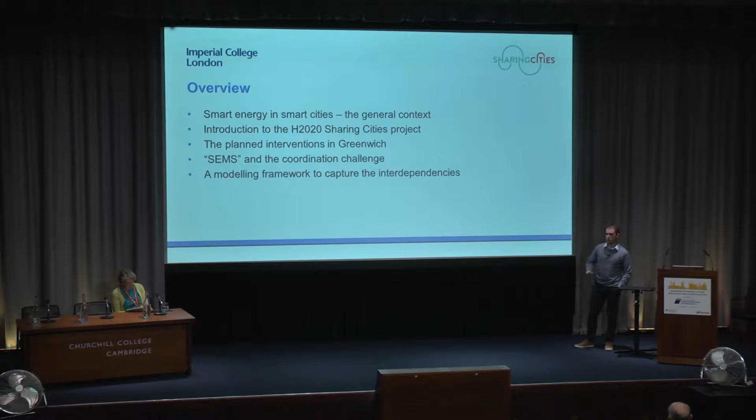Following that, I'll briefly talk about SEMS. That's the energy management system that we're developing as part of this project. The point of the system is to coordinate the different energy assets, and I'll talk about some of the challenges with that. And following that, I'll talk about the real meat of the paper I'm presenting on, which is the modeling framework that you can use to design these urban energy systems, given that they're now controlled in more intelligent manners than before. I'll then show very briefly some case studies.

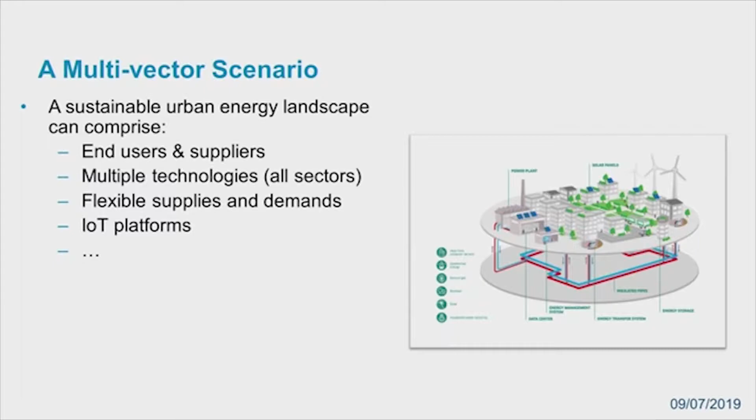So in terms of context, what do we mean when we talk about urban energy and what are the real opportunities here? In an aspirational, idealized case, we can see this as an ecosystem of assets with end users and suppliers all operating in unison to provide globally beneficial system performance. That might mean better in terms of financial performance, better in terms of environmental performance, better for fuel poverty, better for air quality.

There's all these different objectives, but that's a little hypothetical because the problem itself is really complicated. You've got different technologies, you've got different levels of stakeholders between government bodies, the national grid, the energy users themselves, let's say SMEs who own smart sensor companies. So you can really only consider it a smart urban energy system if these assets can collaborate in some way that's actually beneficial for everybody.

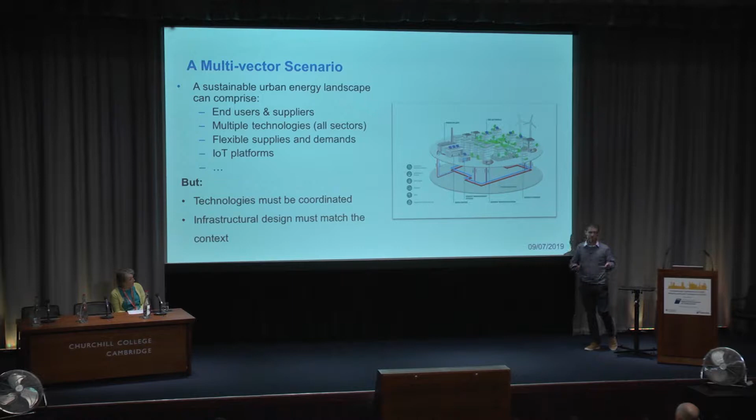And furthermore, because this is more complicated than it would have been before, where all these actors would have been acting in silos, the design of these systems is now a little bit different, and the design is also very contextualized. What I mean by that is that, as with any urban challenge, there isn't any silver bullet. There's no one single solution that will work for every city. Many reasons for that. I've put some of them in boxes here.

You've got different levels of resources available. You've got different policies, different pricing structures for energy types. You've got different mixes of stakeholders, and certain technology preferences. If you're in Scandinavia, for example, you'll have district heating, as that's very common, whereas in many other countries it's not. And following that, there's also cultural impacts.

Again, in Scandinavia, because of these district heating networks, they're quite used to these communal energy systems. So you can talk in terms of system-wide interventions that benefit everybody, whereas that's a lot more difficult to introduce into places that aren't used to that. Then you've got subsidies and taxes as well. It's different everywhere. So you need to think about all these different considerations whenever you're designing these problems.

Which brings me to the Sharing Cities project itself. It's a 25 million project. It's quite large, so I'm not going to give the overview of the whole thing because it's a typical Horizon project where there's many threads. The purpose of it is to set up 3 lead cities as pilot cities where they can act as proving grounds for certain technologies that are becoming new. There are 3 follower cities then which try to take these innovative solutions and apply them to their own contexts.

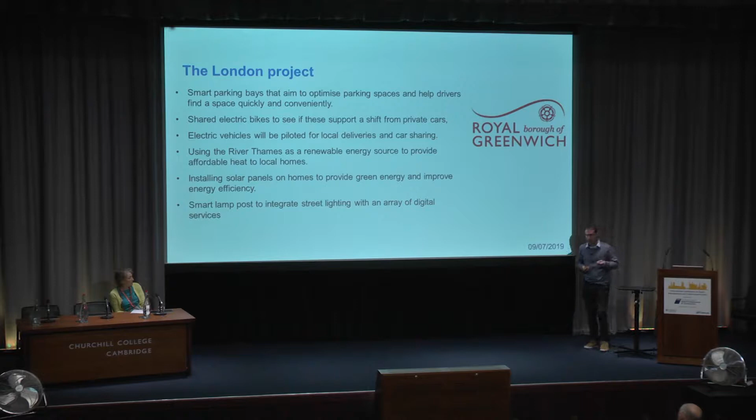And so Greenwich are looking at using the Thames to provide heat for heat pumps to heat the social housing within the district. Further to that, they're also introducing some renewables, that's some PV, and smart lampposts and different things to allow users to interact with these systems.

So drilling down a little bit deeper, just to give you an example of one of these interventions and the kind of stuff that they're doing. This is the Ernest Dence estate. It's a social housing complex with 95 flats. It was built in the 1970s, I think, but they're planning this deep retrofit, and they're planning on putting in proper monitoring systems in the heating systems and putting in demand response and managing this using this energy management system.

So it should act as a useful actor within this energy ecosystem rather than being just a drain on energy, and a poor performing one at that. The existing situation is it's not performing very well as things stand, which means that there's a bad baseline, which is kind of good for research. Anything we do will be great.

But there's 3 gas boilers which are operated continuously, and there's pretty much no monitoring. There's no control that the users have of these radiators, so if the system is on, it's on. The control that they use, you can see if you walk past the apartment complex, is that the windows are always open. So if you want to cool down your flat, you just open the window.

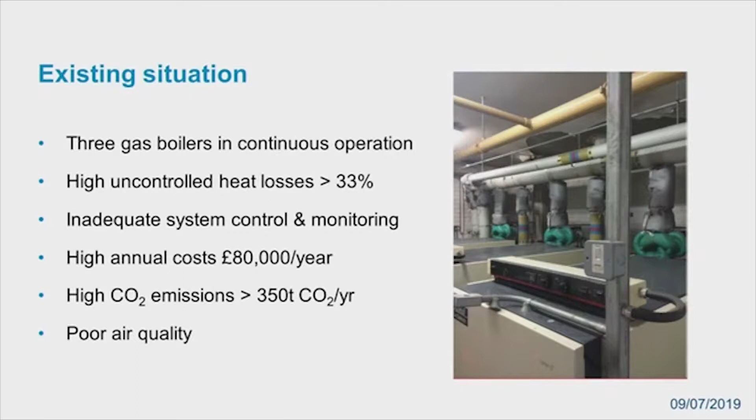The radiator still runs. So it's quite poor, and as a result, you end up with a really high annual energy cost, and you end up with a really high emission rate associated with that. There's also air quality issues if you've got these old boilers running in this kind of urban setting.

So they've got some different interventions that they're planning to put in place. They're doing the typical things such as roof insulation and wall insulation, replacing windows and lighting. They're also replacing the heat network, which is what we're a little bit more interested in, with a low temperature heat network with heat interface units that allow the heat pump taking heat from the Thames to deliver heat to the apartments at a great reduction of carbon.

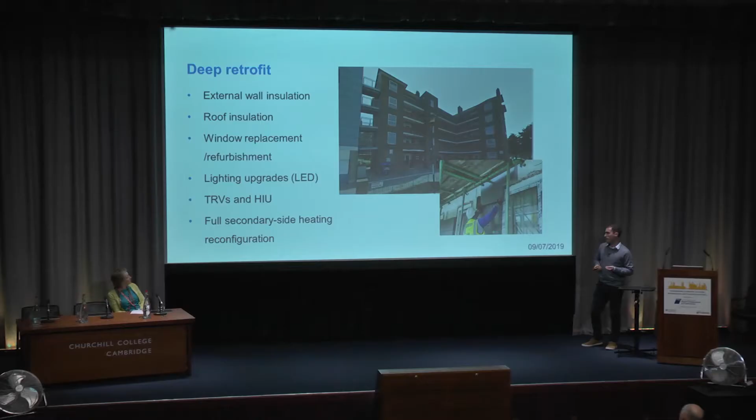And they're reconfiguring the full secondary side of the heating circuit, so you're getting a lot of savings there. So that's one of the main focuses of their work. But in the wider Greenwich system that we're looking at, as well as that Ernest Dence estate, which is in the middle, you've also got PV generation. You've got the heating network, where instead of these old boilers, they're now going to have heat pumps, as I say, as well as some thermal storage.

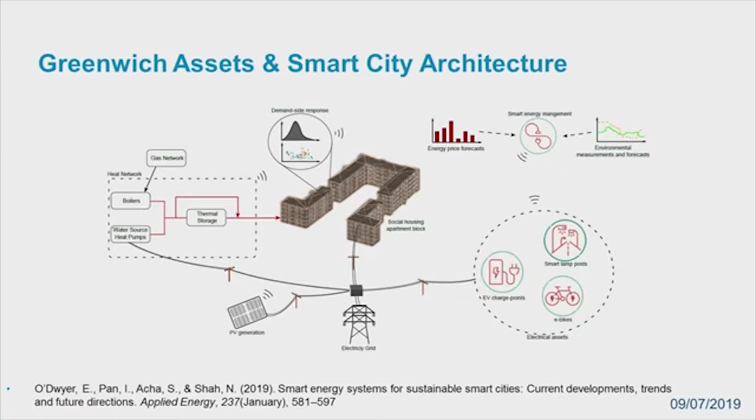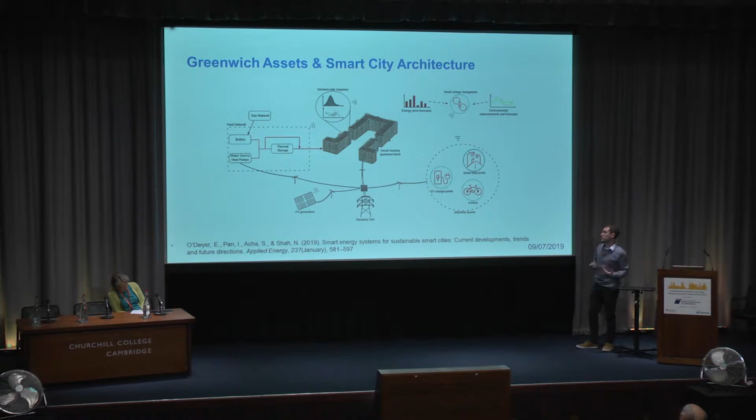So thermal storage is great. You get flexibility that allows you to coordinate things, so you can use the store as a form of flexibility. As well as that, they've got new EV charge points. They've got some e-bikes, some smart lampposts, and the entire thing should be managed by this smart energy management system, which takes forecasts and pricing information and uses various types of intelligence, some machine learning and model predictive control, and new intelligence techniques to provide the solution that works best for everybody.

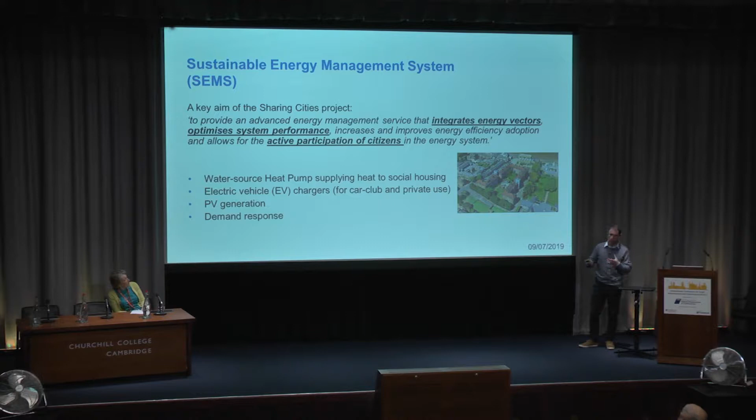So yeah, this is what this energy management system is. One of the main remits of the project is to develop this. So if you've got heat networks and you've got EVs, you can manage the whole thing in a way that if you've got a spike predicted for your EV usage, you can offset that by using the flexibility in your thermal network. So in theory, this is all pretty good. That should work quite well.

So that's one side of it, but also as well as that, with this energy management system, you want to be able to exploit different changes in pricing to allow you to get cheaper energy. You want to be able to exploit changes in the grid emissions, so you can get reduced CO2. And you want to be able to do it in a way that, and this is one of the most important bits, peaks don't completely screw your electricity network.

It's a big thing if you're electrifying everything. That's a massive strain on the current power network, and retrofitting all this infrastructure costs an absolute fortune. So if you can find ways to reduce the need to increase the capacity of these power networks, then it's really worthwhile. So in theory, that all makes sense. In theory, that's fine. But it's a really complex system, so there's a lot of decision variables here, and it's a difficult optimization problem where you need to think about actors at different levels.

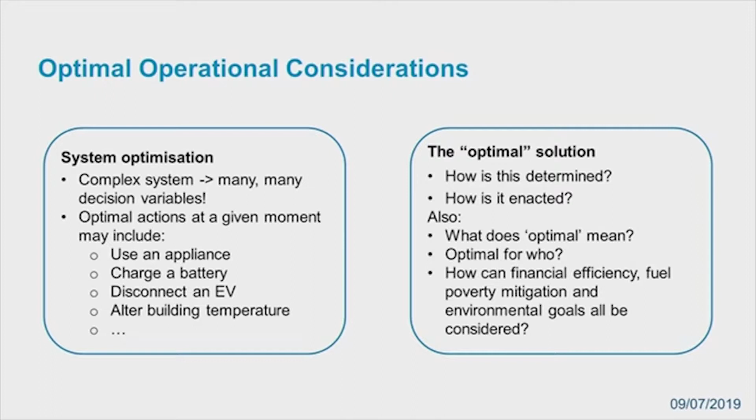As I said before, you've got financial efficiency, fuel poverty, and environmental goals. Fuel poverty can be quite an important one, particularly for councils. One of their main objectives is that you're not managing these systems in a way that somebody could buy a battery because they've got the money to buy a battery and exploit this more, whereas someone who can't afford a battery can't exploit this, so doesn't get the benefit. So how do you do it all fairly?

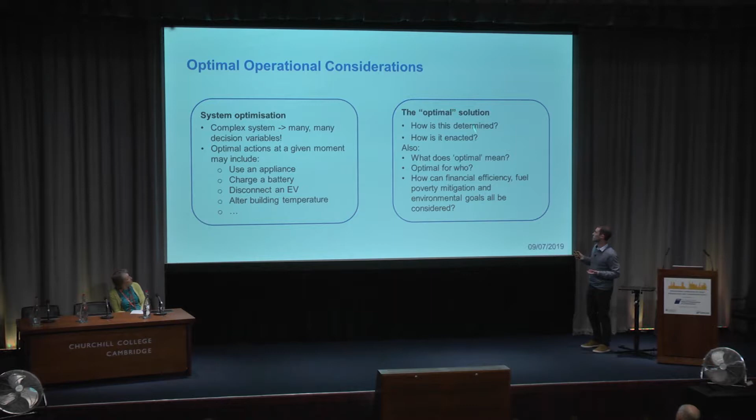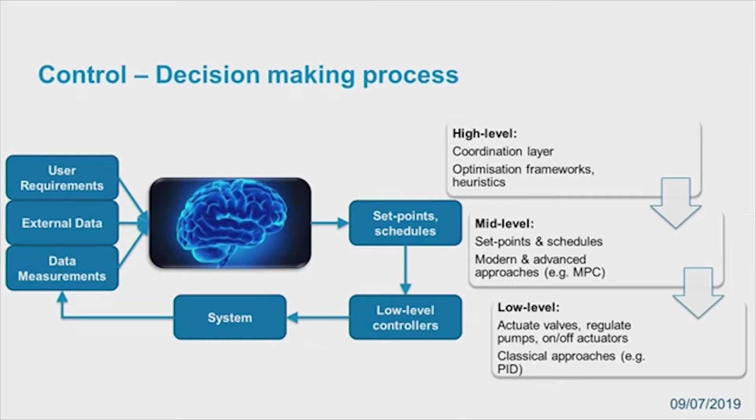It's quite difficult. So the first two points were kind of more technical, and this is sort of how the technical side of it looks. It's kind of a classic diagram that I'd show when I'm giving more presentations about what's actually under the hood of the SEMS algorithm, but it's basically you're taking measurements from the system. You've got wireless sensor networks everywhere.

You're gathering all this data, you're putting it into this brain, which is this mix of machine learning algorithms, optimization algorithms, some model predictive control, and you're spitting out some set points that you send back to the controllers. The point is that you're not actuating at the low level. That's kept separate for the sake of robustness. If something happens here, you don't want the whole system to break.

So you're kind of operating on the mid-level and at the high level. At maybe 10 or 15 minute intervals, you're sending new set points. Maybe predicting operation for a day ahead, that kind of time scale.

But the reason I don't want to go too much into that is because essentially all of this is part of this brain, right? And what is important to consider here is that as much as I might use a slide like this where it's just this mystical brain, that's not actually that useful. If we're dealing with councils and residents and people who actually want to get benefit out of this, cloaking all of this in this mysterious intelligence layer, which is like this magical box that gives you the best answer to every problem you've got, that's not really very useful.

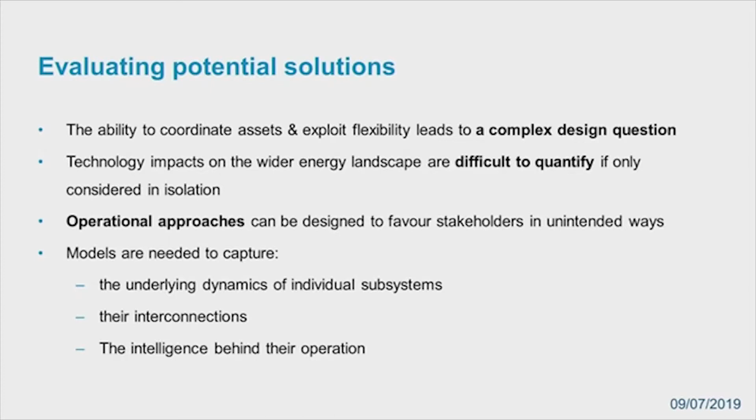And we need to think about how the operational approaches can be mapped to the different stakeholders to avoid certain stakeholders getting all the benefits and others not getting any of the benefits. So for that, we need modeling, and we need possibly new levels of detail in the models that would typically have been used before, because we have a lot of scope in terms of the number of systems that we're dealing with. All these systems interconnect.

The more you grow your energy management system, the more systems you're going to have interacting with each other. How do you capture all these systems in one modeling platform? But you still need the detail to be able to consider these operational 10-minute changes that will really underpin the entire performance of the system. So you also need to be able to capture the intelligence behind the actual operation of the system within this modeling platform.

So this leads to talk about digital twins, which I'm going to use the term in a very careful manner because different people have views on what exactly it is, and I think a lot of people with CSIC here are doing some really good stuff in nailing down exactly what is a digital twin and what isn't, so I'm going to be careful so I don't say anything wrong. But we can think about it as another way in which a digital twin is really useful.

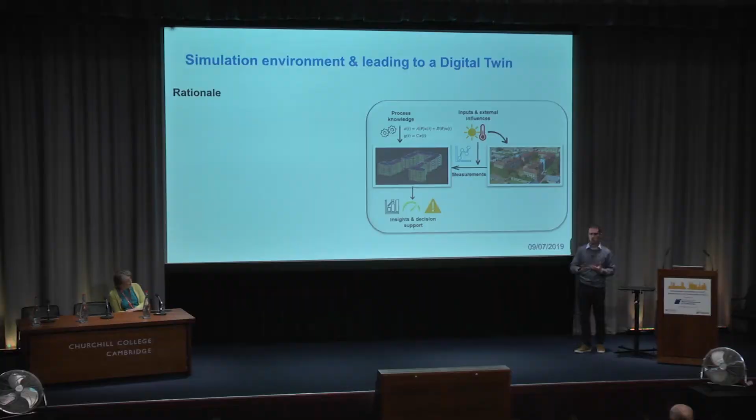If you've got a virtual representation of your system, let's say it's working online, let's say it's working in tandem with your real system, well then you can see what happens with different operational decisions. You can see if you change your intelligence, if you re-weight your objectives, you can straight away see what the impact on the system is in the terms you want. So in terms of pounds, in terms of tons of CO2, in ways that can be understood by councils and by residents, by everybody, which you just can't really do if you don't have this detailed model available to you.

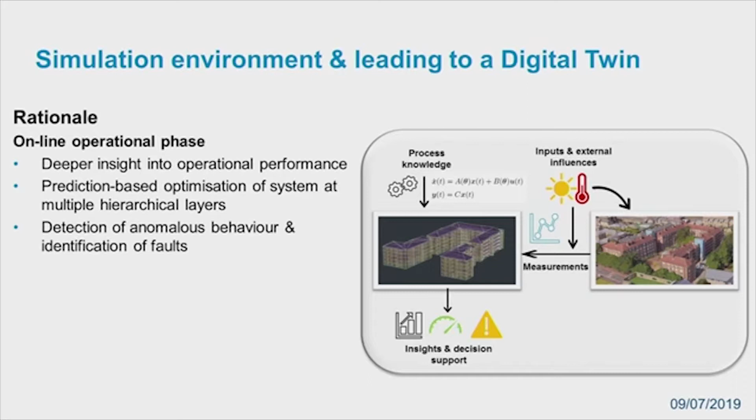So it gives you a deeper insight. It allows you to see if something's maybe going wrong. As these systems get more complicated, the worst thing that could happen would be maybe some kind of a cascade failure where one system breaks and the whole thing falls over. So it's becoming more and more important to be able to detect these kind of anomalies offline, or online. So that's the online aspect, where I'm okay in calling that a digital twin. The offline bit, I'm not really sure.

But prior to the development of your system, you also need to think about the design challenge. As I've reiterated several times, obviously the design is impacted by the intelligence. So you need to be able to actually do some simulation work. You need to be able to do some sensitivity analysis on the different parameters to see what will work better before you actually install these things. Maybe a massive thermal store will work for one person, maybe it will not work for somebody else. So it allows you to do this design and analysis.

Now, what that means is it's prior to the development of the actual real infrastructure, so it's some kind of digital only child, I don't know. I'm just gonna call it a digital twin because it's easier, but it allows you to do apples versus apples rather than apples versus oranges for these things. You can really quantify what's going on. So that was the approach we decided to take.

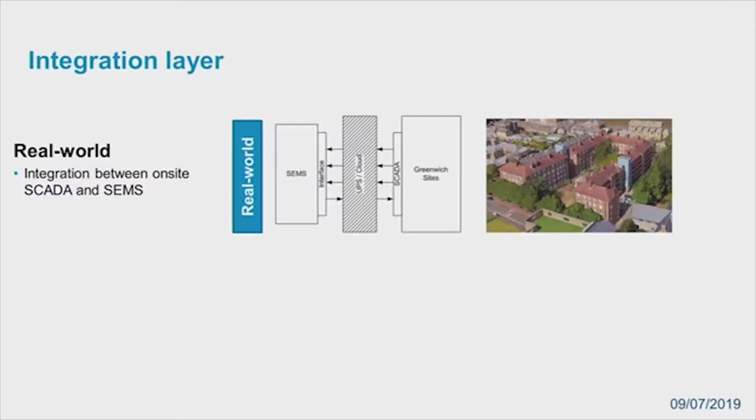So prior to that, we need to think about how we design the algorithm, but also another factor which I haven't really mentioned yet is this integration layer. This integration layer for this project is being developed by Siemens, and it's not necessarily straightforward how you communicate all these sensors to a central platform. That's not an easy problem. Being able to do that in silicon is very useful, it allows you to make your mistakes in silicon. So you're not doing something that just won't work, or won't be able to operate at the timescale you want. You'll have lags maybe that you don't want. You'll have dropouts that you don't want.

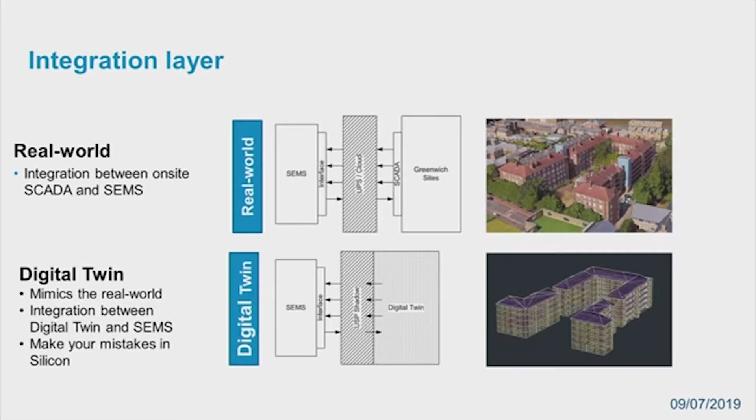So that was the approach we decided to take. Because we've got this delay before the real world case happens, let's do a proper job. Let's develop a digital twin of the system that can mimic the real world as best we can. We can design our interface layers. We can design our intelligence algorithms in a way that is understandable to councils, residents, everybody. So, yeah, quickly I'll go through this.

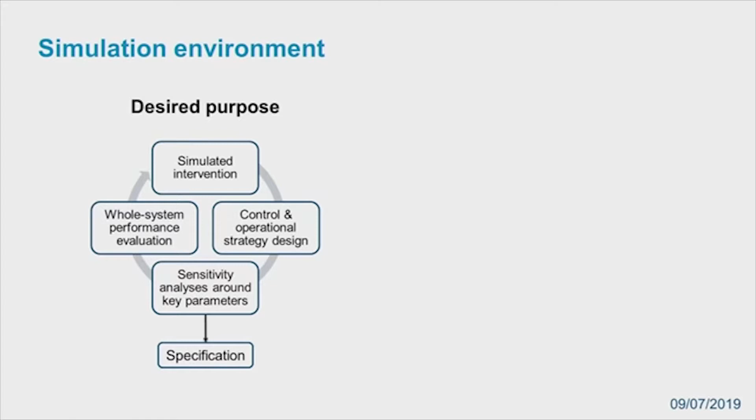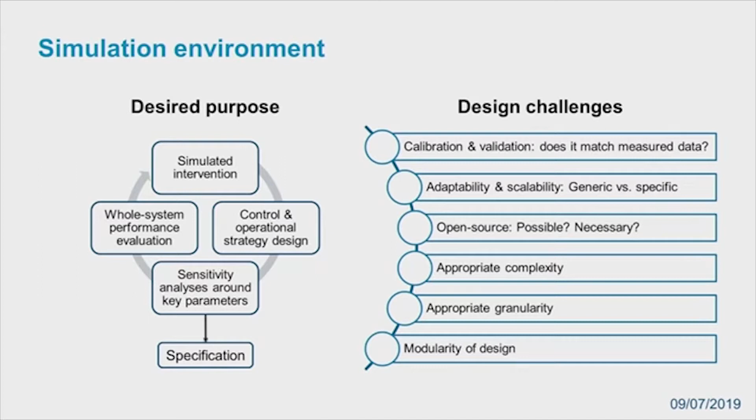The purpose of the simulation environment is, again, you want to be able to test different control strategies, different designs, and you want to do some sensitivity analysis. Some of the challenges, which are probably more interesting: first of all, is it valid? How do you get it to match measured data if the systems don't exist yet? Adaptability and scalability, that's really important.

The point of this project is a proving ground for technologies. We're not trying to do a single solution that works in one city. Obviously, solutions need to be designed for each individual city, but maybe the process as to how you evaluate these solutions can be common. So how you do a modeling framework that's adaptable and replicable. We initially were going to do everything in MATLAB because we're academics, that's what we find easiest to use, but it's not feasible to transfer that to everybody.

If you need many people to use a technology, there's always going to be a link in the chain where a software license will be a problem. So we shifted everything to open source. The intelligence is all in Python. The modeling software I'll talk about in the next slide.

We also need to think about what's the level of complexity you have. So you need it to be able to run and contain enough detail, but you also need it to be able to run sensitivity analyses, which might involve a lot of simulations. And granularity, same issue. And modularity. So can you just add new components without having to redevelop the entire thing?

So the architecture we used, as I said, was open source. We used this Ptolemy 2 framework, which was developed in Berkeley. It's pretty neat. It's kind of like MATLAB or Simulink, but it's open source. And it's got different packages that are built with Ptolemy 2, one of which is the Building Controls Virtual Testbed, BCVTB, which is very useful for co-simulation.

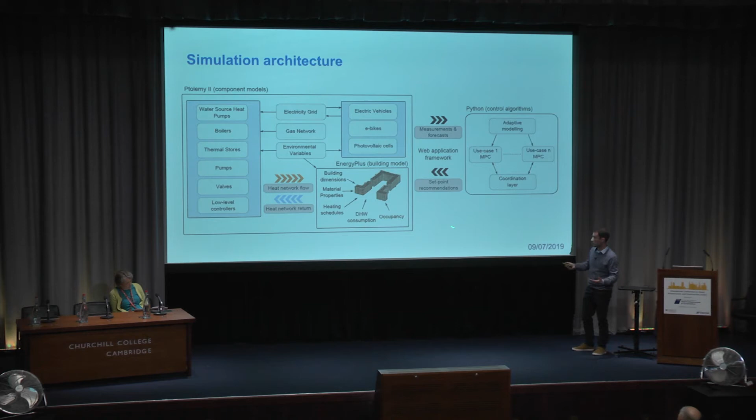And when it comes time, after we're happy with the integration layer and we're happy with the intelligence, we then just plug this out, plug in the real system, and everything should work. We'll see. Maybe it won't. I don't know. So that's essentially the solution we came up with.

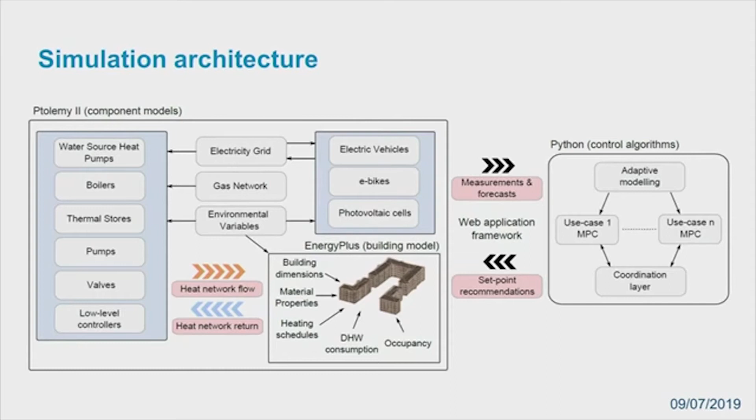And we did some validation of that using the only system component that's already there, the pre-retrofit building. The real data is in black, so there's a couple of dropouts, but it's pretty good. This is measured with the Siemens Navigator API. And this is the total heat load of the building. Actually, no, it's the total gas consumption of the building. And the orange is the modeled version, and it's pretty good.

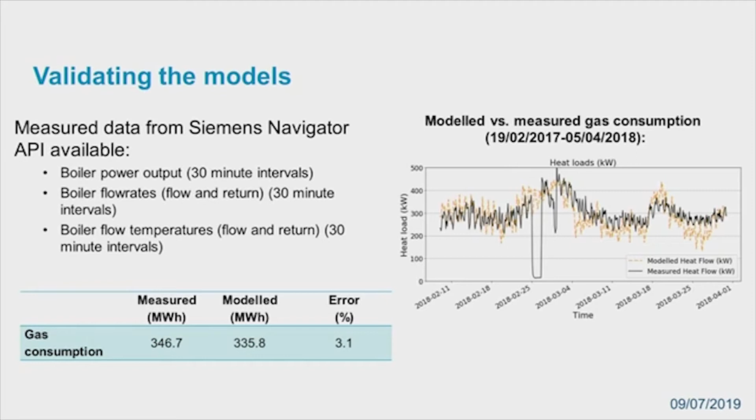The total error for the full period, this is about 56 days, is about 3% difference. That's really good. And more importantly, because it's always going to be a little different because you're making certain assumptions about the user behavior, it's capturing the trends that follow the weather, and it's capturing the day-to-day heat load profiles pretty well.

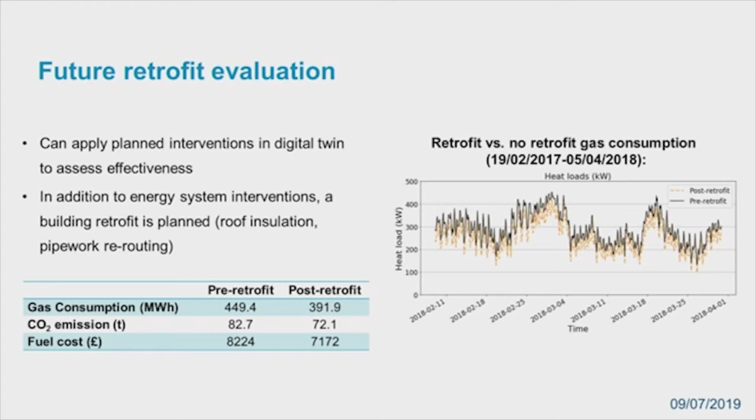So it'll be interesting to see if that lines up with what actually happens. That's without changing any of the heat networks, without adding the intelligence, without doing any of that.

So then we talk about actually adding the heat networks, bringing in this electrification of heat, bringing in this intelligence layer that manages this, so as a start, just as a case study, it's either able to minimize the cost, so the operating cost, or it's able to minimize the operating CO2 emissions.

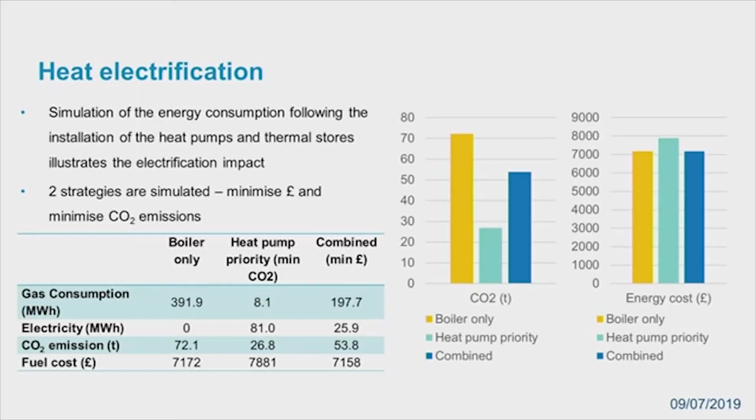And even though this is quite simple, and for a lot of you guys here, this will be quite obvious, it's kind of powerful being able to show people, and people in the council in particular, something as clearly as this. Because if I'm talking about, okay, you've got this multi-objective problem, how do you weight the objectives? It's much easier if you can just show a graph that says, okay, look, with the CO2 minimization, this green is the CO2 you get. If you use the pound minimization, this blue is the CO2 you get.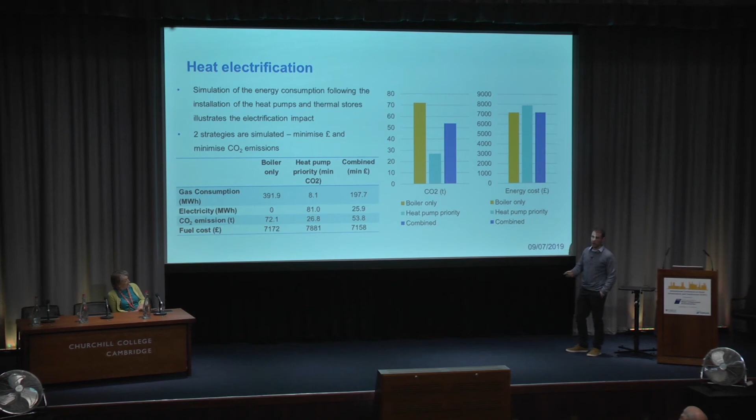You get way more CO2 if you minimize pounds, but you get this extra cost if you try to minimize CO2. So you can straight away say, is this worth it to you? So this allows decision makers to say, well, is it worth it to us? And if we need a balance between the two, well, we can do that too.

So inevitably, these multi-objectives will come out as these kind of Pareto curves where you can balance these different objectives and say, okay, how much energy saving is worth saving a certain amount of money? How much is each ton of CO2 worth for you, or how much are you able to afford? How much comfort is a user willing to allow you to use as flexibility for the wider system? You can quantify all these things very easily with this now.

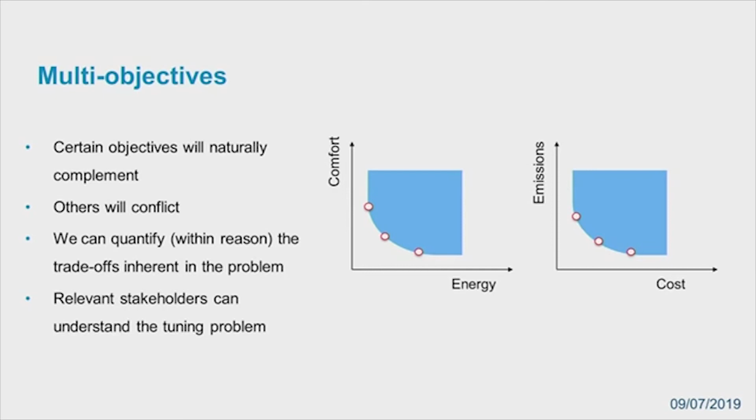And you can then look at it from the design point of view. If you're putting in PVs, you can then say, okay, this kind of changes the design case compared to putting in PVs in a normal situation if you didn't have a heat pump running concurrently. Because the operating costs of your heat pump are higher because you're using this electricity from the grid.

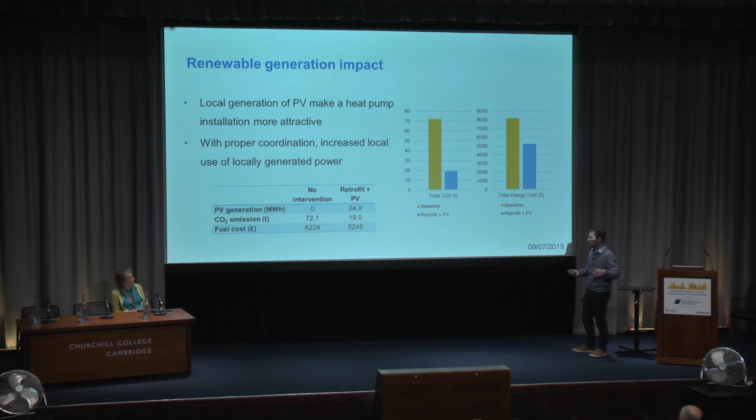If you're able to use electricity from the PVs, then now you can come up with a situation where your total CO2 is much lower because you're using a heat pump and you're using PVs to generate the power for it as much as you can. And your energy cost is less because you're not buying as much from the grid. Now, that's a little better than if you were to just install the PVs and use the PVs just to sell to the grid.

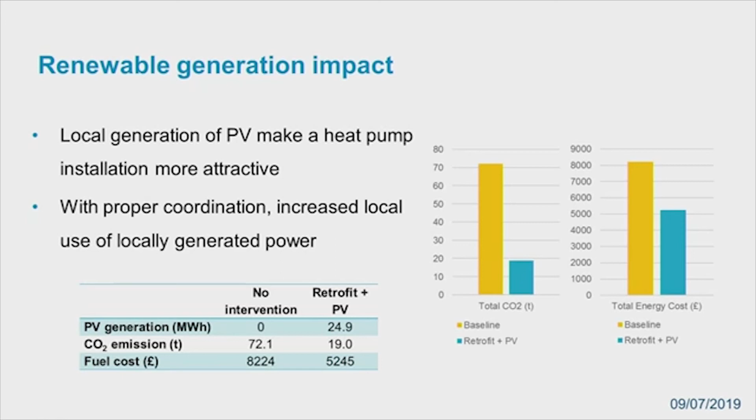You might not be able to get this kind of combined performance. So then you'd be able to do sensitivities around this by saying, okay, how much PV is worthwhile? At what point are we just going to end up selling most of it to the grid? And you can do a proper intelligent design that allows this intelligence algorithm to operate in the way it's going to operate, and you can see what effect it's going to have.

So just to end on some learnings, when we're talking about modeling and when we're talking about control and we're trying to scale up, over-specifying everything doesn't really work. So the modular approach is really necessary. We had a more specific approach, but there's no point because every case is going to be slightly different. So you need things to be scalable, otherwise nobody will have any interest. If you tell somebody you need to do it exactly like this, they won't do it. They'll do it their own way.

The same applies to the control. If you try and tell people, okay, this is the forecasting algorithm we're using, they might not want to use that. Everybody wants to use their own. So you need to be allowed to use this kind of more plug and play approach. Underspecified is obviously not useful because it won't do anything. Modular approach is what you need for transferability and scalability.

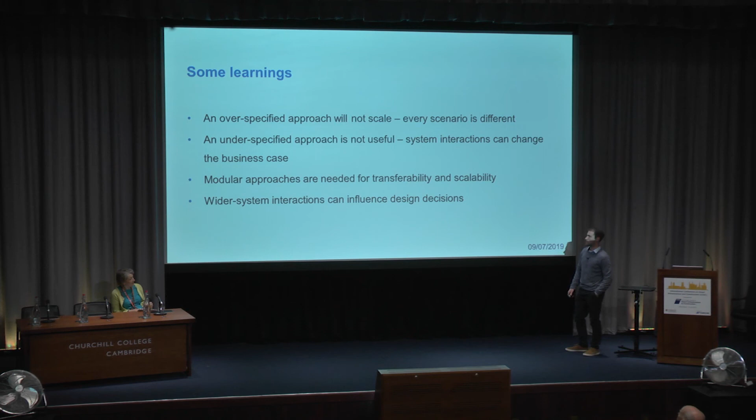And yeah, just the main takeaway is that the wider system interactions, and in particular how these new intelligence algorithms can manage these wider system interactions, can and should influence the design decisions. So that's just a summary of everything that we've done. I don't think there's anything really needed to go through with that.

So thank you for listening, and just some of the main contributors, just to point them out, even though there are lots of contributors to the overall project, for this particular bit: that's the GLA, the Borough of Greenwich, that's the council we're working with, that's Siemens who are doing the integration there, and us at Imperial College.